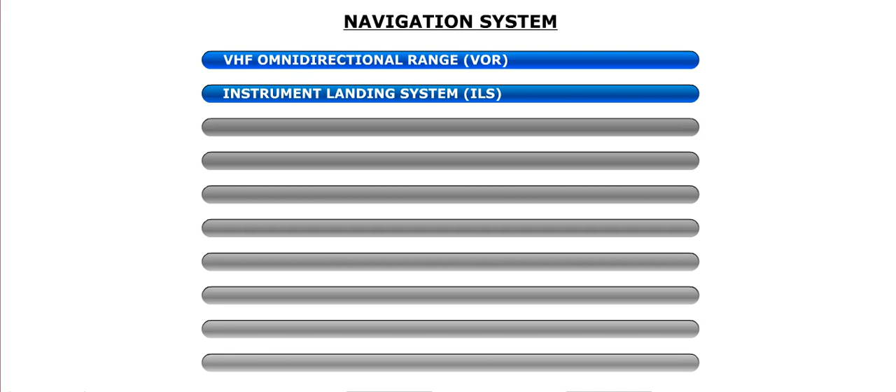The ATR is equipped with the following navigation systems: VHF Omnidirectional Range, or VOR, Instrument Landing System, or ILS, Distance Measuring Equipment, or DME, Automatic Direction Finder, or ADF, Marker Beacon, Radio Altimeter, Enhanced Ground Proximity Warning System, or EGPWS, Weather Radar, Global Positioning System, or GPS, and Flight Management System, or FMS.

The navigation system uses numerous antennas that are mounted on various locations on the exterior of the aircraft.

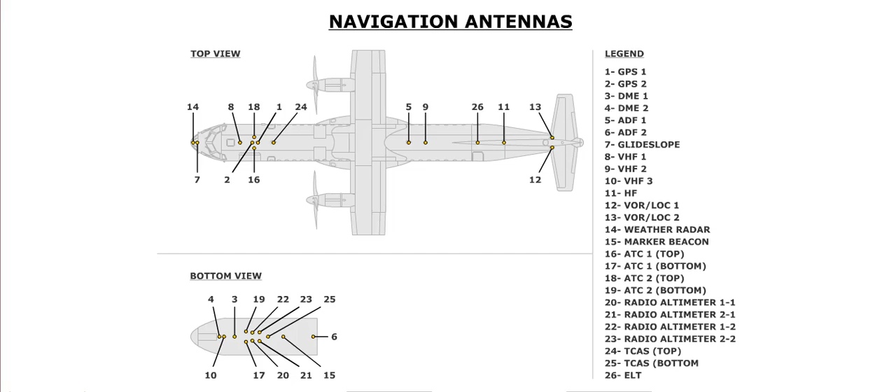Navigation information feeds audio signals to the Remote Control Audio Unit, or RCAU, so that the crew may identify and verify station identifiers. The RCAU is the central processor of audio signals from all of the cockpit electronics. There is a separate processor for each crew member, which controls audio based on what the crew selects on their individual audio control panel, or ACP. There are different channels of output for headsets, loudspeakers, etc.

There are two navigation receivers, VHF Nav1 and VHF Nav2. Each navigation receiver integrates VOR, ILS, marker beacon, and ADF receivers. If a single DME receiver is installed, it is integrated in the VHF Nav1 receiver.

VHF Nav1 feeds data directly into the Integrated Electronic Standby Instrument, or IESI. Both receivers supply data to the Data Concentration Applications, or DCAs, located in the core avionics cabinets, or CACs. Data is then fed to display units 1, 2, 4, and 5, as well as both multifunction control display units, or MCDUs.

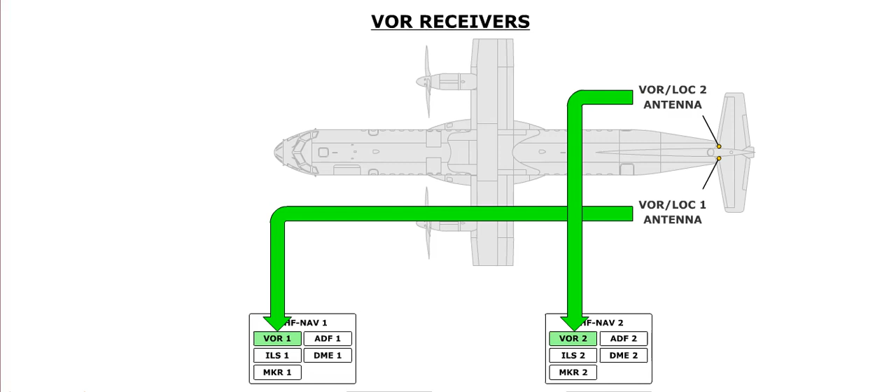The VOR receivers are tuned using the Virtual Control Panel, or VCP, and the associated Multifunction Panel, or MCP. The VCP appears on the lower right side of the multifunction display, or MFD. Click on the Nav button on the MCP to view the VOR navigation page on the VCP.

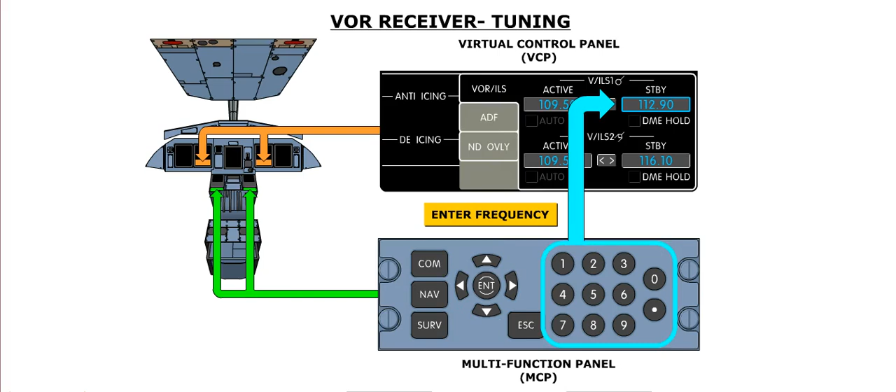The four arrows on the MCP are used to select the field that you wish to modify. The Enter key is used to activate that field. A cyan box appears around the selected field. You can then use the numerical keys to enter the desired frequency. The standby and active frequencies can be swapped by selecting the field in between the two frequencies. It should be noted that you can directly change the active frequency without the need of entering a standby frequency.

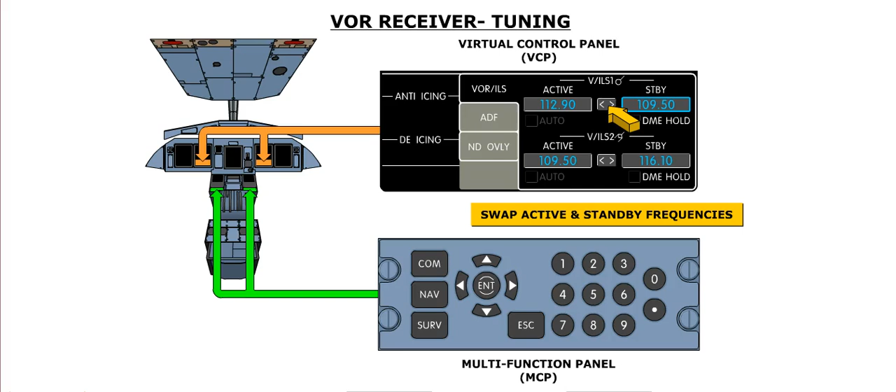The nav tuning page for nav1 is displayed on the MCDU screen. Frequencies are entered in the scratch pad. You can set the active or standby frequency by pressing the line select key adjacent to active or standby, respectively. Click on line select key R1 to make the standby frequency the active one.

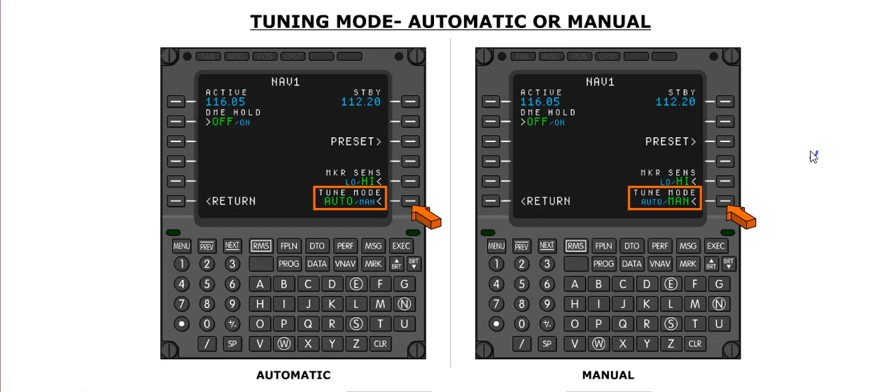The navigation page also enables you to hold the DME associated with the frequency, and change the sensitivity of the marker receiver.

The aircraft is equipped with two ILS receivers, ILS-1 and ILS-2. ILS-1 is located in VHF NAV-1 receiver. ILS-2 is located in VHF NAV-2 receiver. The IESI uses ILS-1 only.

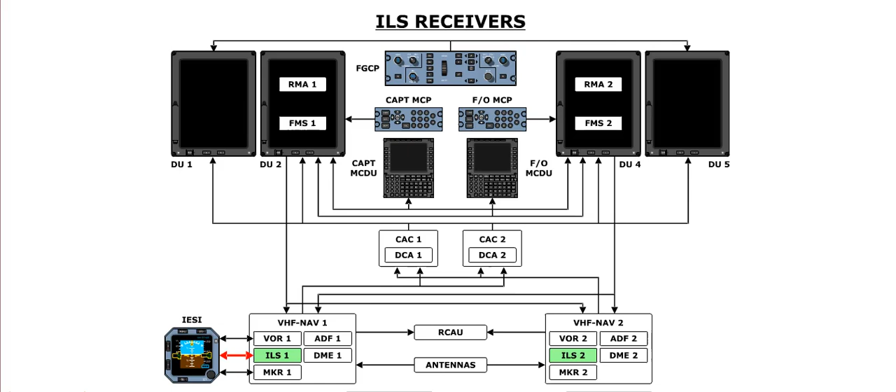The ILS receivers are independent of each other. However, they share the same glide slope antenna. The localizer antennas are actually the same antennas used by the VOR system, located on the vertical stabilizer.

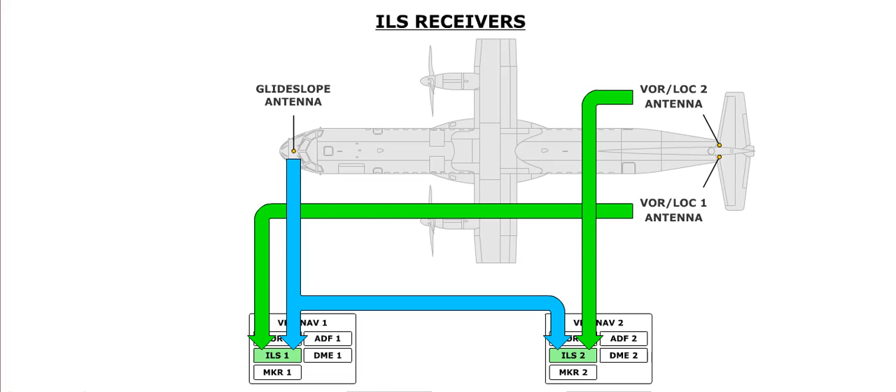The ILS receivers supply audio signal information to the RCAU. The ILS receivers are tuned using the VCP and the MCP. The MCDU is also used to tune the ILS frequencies. The procedure is identical to the VOR tuning.

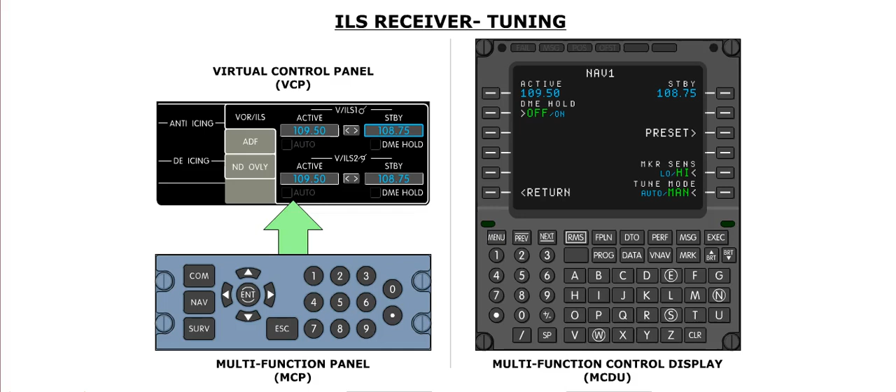The ATR has two marker beacon receivers. Although independent of each other, the two marker beacon receivers share the same antenna. The marker beacon antenna is located on the bottom side of the fuselage, just forward of the main landing gear base.

The marker beacon receivers are designed to receive marker signals from the outer, middle, and inner airway markers of an ILS approach. Station passage is indicated by an audio signal and an indication on the primary flight display, or PFD.

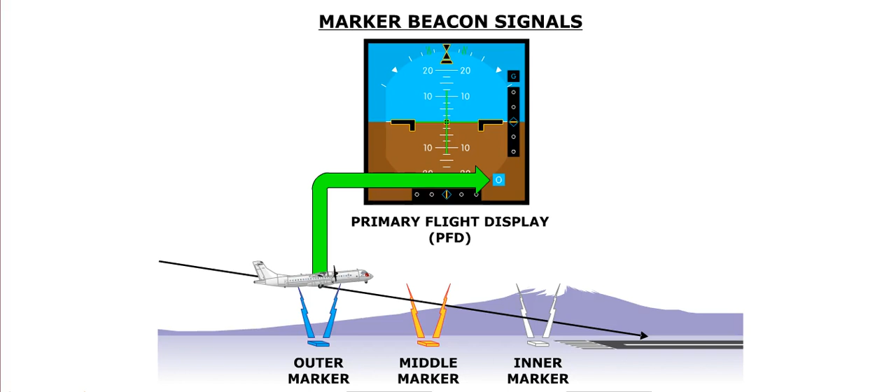The sensitivity of the marker beacon system can be adjusted on the nav tuning page of the MCDU. The sensitivity of the receivers can be adjusted to low or high. This sensitivity is changed by pressing the adjacent line select key.

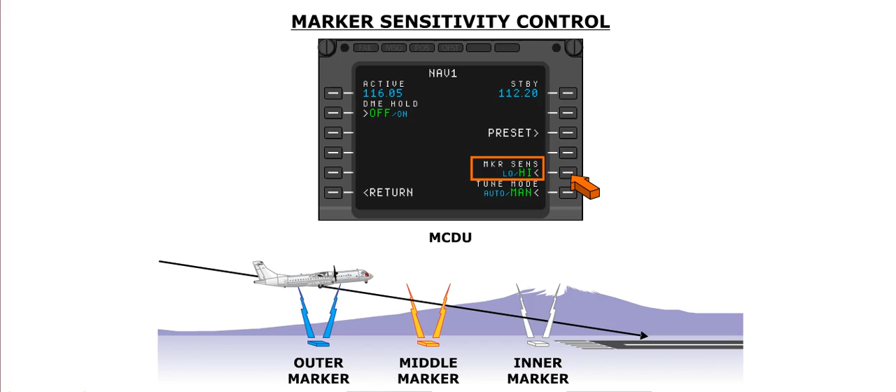The DME system measures the slant range to selected stations. The DME distance is displayed on the PFD and the navigation display, or ND. The DME has 3 channels, which allows it to lock in on 3 different stations. Channel 1 is associated with VOR/ILS1, and Channel 2 is associated with VOR/ILS2. Channel 3 is always tuned automatically by the FMS.

DME frequency selection can be controlled by either the VCP or the MCDU. Basically, whenever you tune an ILS or VOR frequency, you are also tuning the associated DME channel.

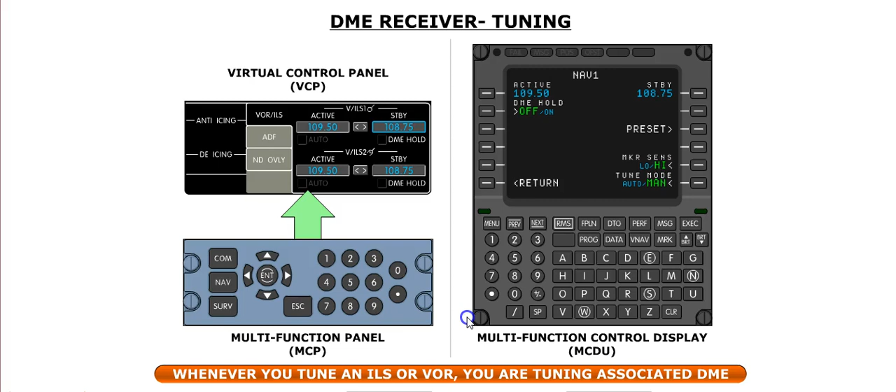One feature of the DME system is that you can hold a frequency. When you hold a DME frequency, you can continue to obtain distance information from that navigation source, even if you change the frequency later on. On the VCP, a DME is held by checking the DME hold box on the VOR/ILS page. On the MCDU, you use line select key L2 to select on for DME hold. On the PFD and ND, a held DME is indicated by the sign H displayed next to the DME distance.

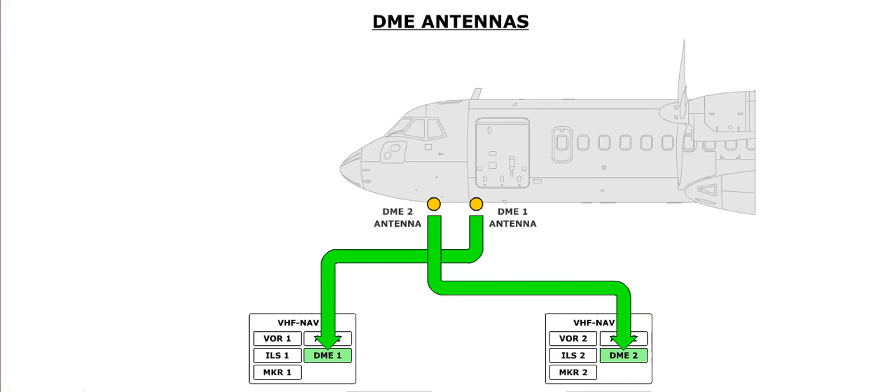Unlike the ILS and VOR receivers, each DME receiver has its own dedicated antenna. The DME antennas are located under the forward part of the fuselage. The DME receivers supply information to the RCAU.

An automatic direction finder, or ADF system, includes a single receiver and associated antenna, which is located on the top of the fuselage. Some aircraft have an optional second ADF receiver, which has an associated antenna located on the bottom of the fuselage.

The ADF radios are tuned using the VCP and the MCP. The procedure is similar to accessing the VOR/ILS radios. Press the nav button on the MCP, and then press it a second time to access the ADF page on the VCP.

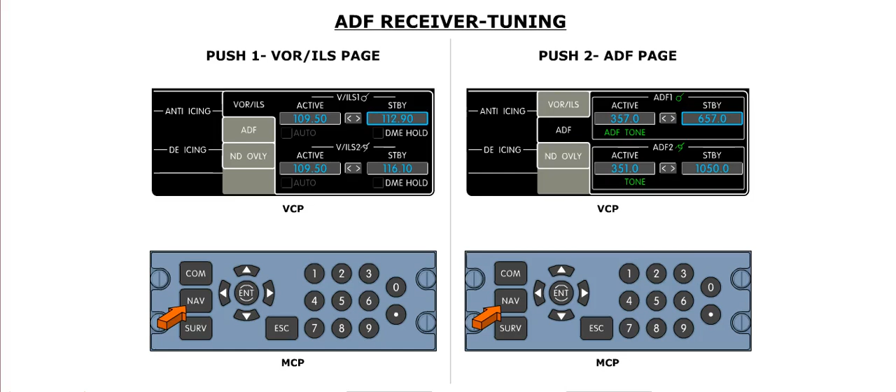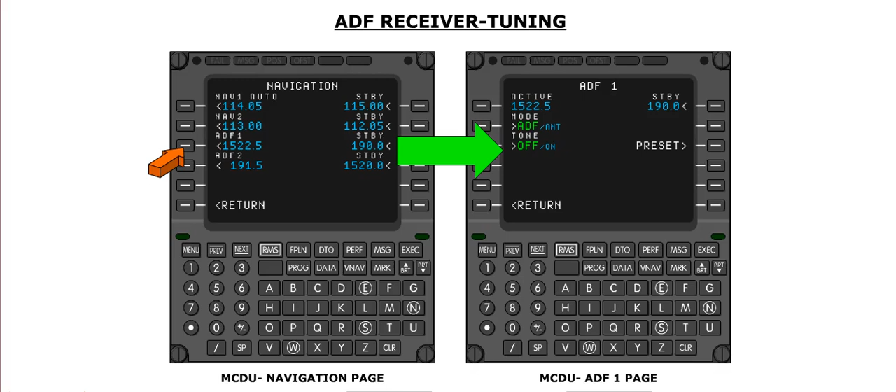The MCDU is also used to control the ADF radios. This is done by accessing the navigation page, and then pressing line select key L3 or L4. This will display the associated ADF page, which enables you to control the active and standby frequencies, mode and tone selection, or access pre-stored frequencies. ADF bearing information drives the bearing information on the HSI on the PFD, and on the ND on the MFD.

The aircraft is equipped with a radio altimeter which provides an indication of the aircraft's height above the ground when the aircraft is below 2,500 feet AGL. There is also an optional second radio altimeter. The radio altimeter system provides inputs to the multifunction computers, or MFCs, the automatic flight control system, or AFCS, the traffic collision avoidance system, or TCAS, and the enhanced ground proximity warning system, or EGPWS.

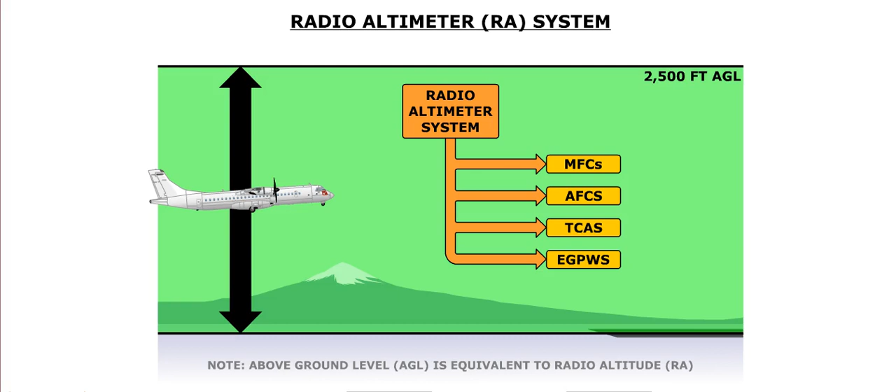The radio altimeter system consists of a single transceiver and two radio altimeter antennas. The two radio altimeter antennas are located on the bottom part of the fuselage, forward of the landing gear bay. Height is determined by reflecting radar signals off the terrain. This system uses the leading edge of the reflected radar wave to calculate the aircraft's height above the ground.

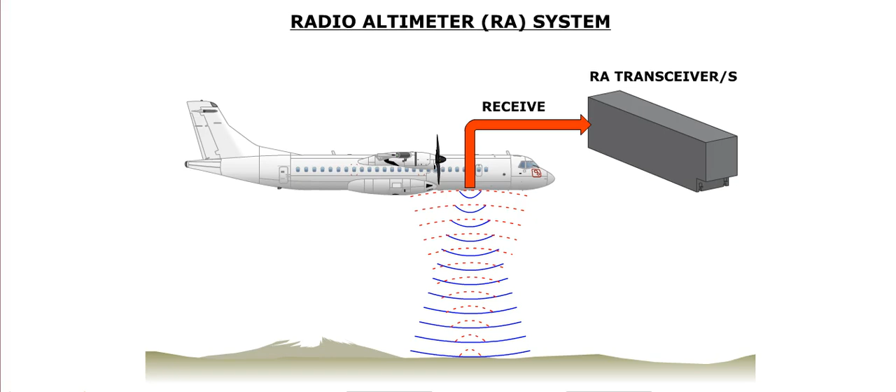The radio altimeter reading is displayed on the bottom part of the attitude indicator on the PFD. The system also drives the altitude above ground indication on the altimeter. The display can indicate altitudes between 0 and 2,500 feet.

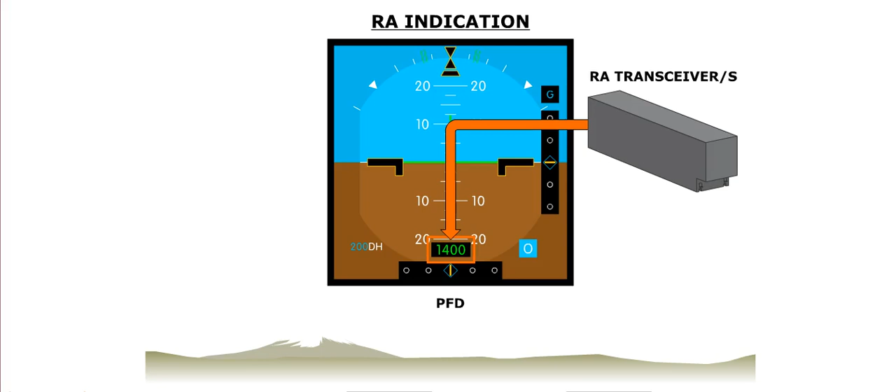A decision height can be set using the Associated Index Control Panel, or ICP. This selected value is displayed in the bottom, left-hand side of the attitude indicator. An additional DH label is displayed when the aircraft descends through the selected decision height.

The ATR is equipped with an enhanced ground proximity warning system, or EGPWS. EGPWS provides 6 reactive modes named Modes 1 through 6, as well as 2 predictive warning modes for terrain and obstacle cautions and warnings.

This system uses internal terrain, obstacle, and airport databases, along with information from the GPS, radio altimeter, and barometric altimeter to predict a potential conflict between the aircraft's flight path and terrain or obstacles.

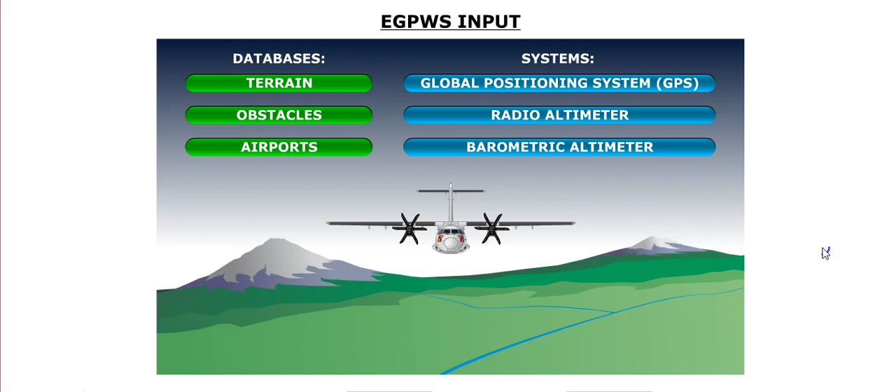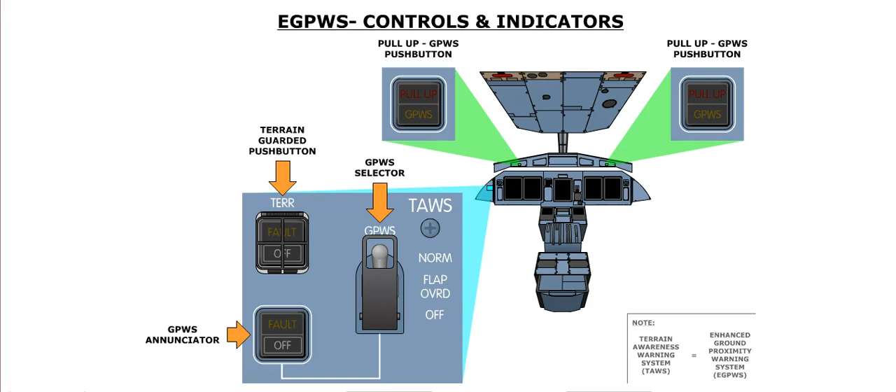The controls and indicators for the system consist of 2 GPWS push buttons on the glare shield, a GPWS selector switch, a terrain-guarded push button, and a GPWS annunciator light.

Terrain or obstacle conflicts result in the EGPWS providing visual terrain alerts that are automatically displayed on the ND, as well as aural alerts. It should be noted that EGPWS is not to be used for navigation purposes.

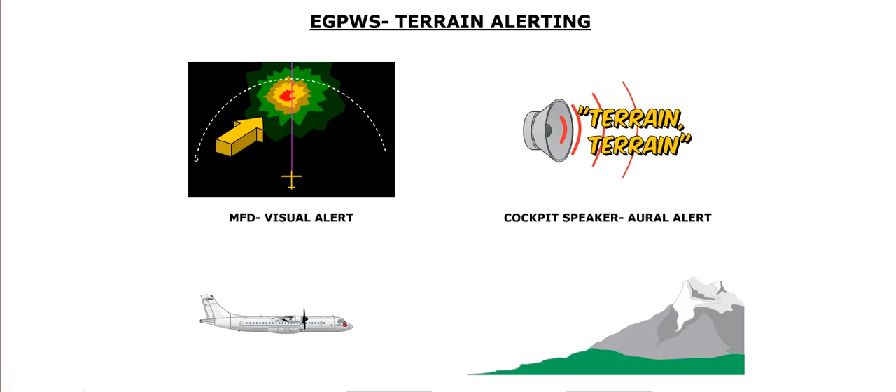Terrain information can always be displayed on the ND by selecting the terrain option on the ND overlay page on the VCP. If the overlay is selected, a cyan terrain on label is displayed on the lower right side of the ND. The terrain display takes precedence over the radar display, so selection of the terrain display will replace the radar display on the ND.

The caution and warning envelopes below and in front of the aircraft are based on airspeed and the current flight path angle.

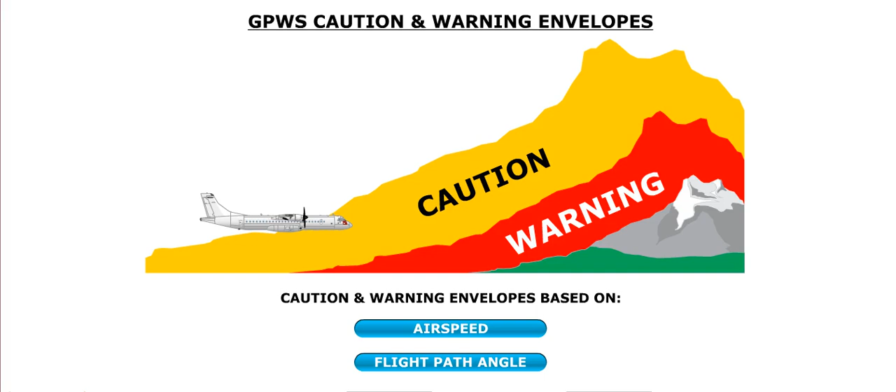Mode 1 alerts are generated when the descent rate is excessive while the aircraft is close to the ground. If the aircraft's descent rate, below 2,450 feet radio altitude, exceeds a certain value, the EGPWS issues an aural sink rate warning, and the amber GPWS caption illuminates. If the descent rate increases, the EGPWS will announce pull up, and the red pull-up caption illuminates. This warning will continue until the aircraft's descent rate is corrected.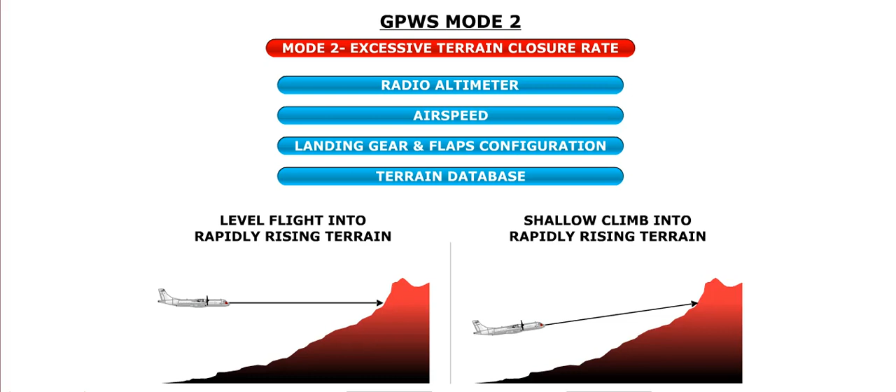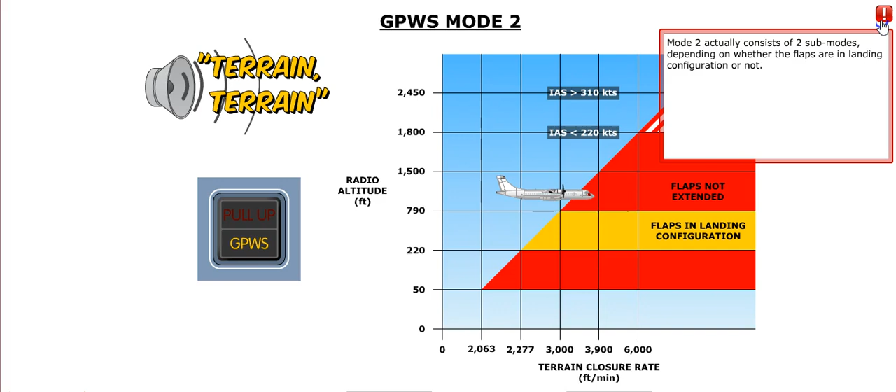Initially, the system will generate the terrain aural alert, and the amber GPWS caption illuminates. If the closure rate is not corrected, the EGPWS will eventually issue an aural pull-up warning, and the red GPWS caption illuminates. The aural warning is repeated until the aircraft's closure rate is reduced. During the correction, the pull-up aural warning will be replaced with the terrain aural caution.

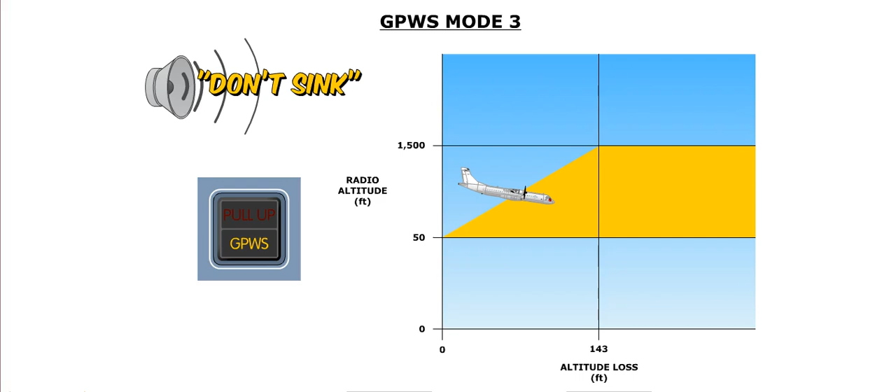Mode 3 provides warnings when there is a significant altitude loss after takeoff or during a go-around. In the event of an altitude loss after takeoff or go-around, the EGPWS will issue an aural don't sink caution message, and the amber GPWS caption illuminates. Mode 3 is disabled when the aircraft has gained sufficient altitude and is no longer in the takeoff or go-around mode. It is active up to 1,500 feet after takeoff or during the missed approach.

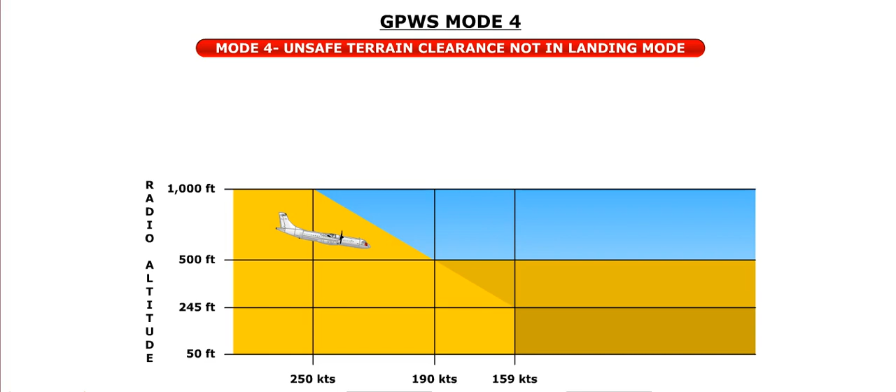Mode 4 provides unsafe terrain clearance alerts and warnings during climb, cruise, initial descent, or approach. The EGPWS uses the radio altimeter and the aircraft's position in relation to the terrain database. Mode 4 actually consists of 3 sub-modes.

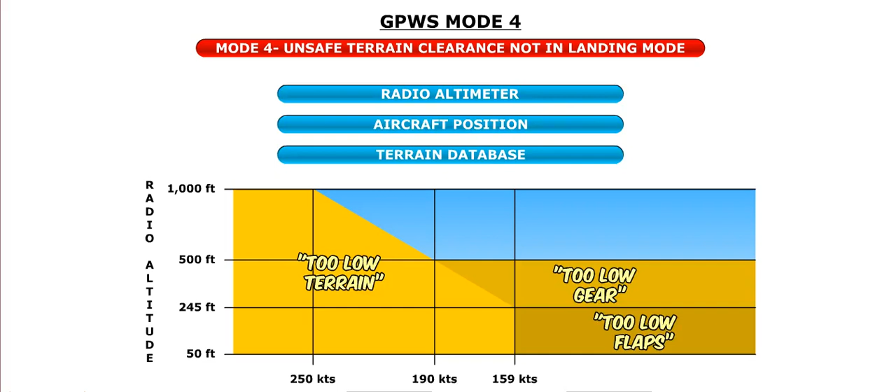Sub-mode 4A provides alerts in the event there is inadequate terrain clearance when the aircraft is not in landing configuration. The boundary for sub-mode 4A is 1,000 feet radio altitude. Sub-mode 4A alerts consist of an aural too low terrain warning, and an illuminated GPWS caption.

Submode 4B provides alerts to prevent a gear-up landing. The boundary for submode 4B is 500 feet radio altitude and up to 190 knots. The oral alert associated with submode 4B is a too low gear aural alert, and the amber GPWS caption illuminates.

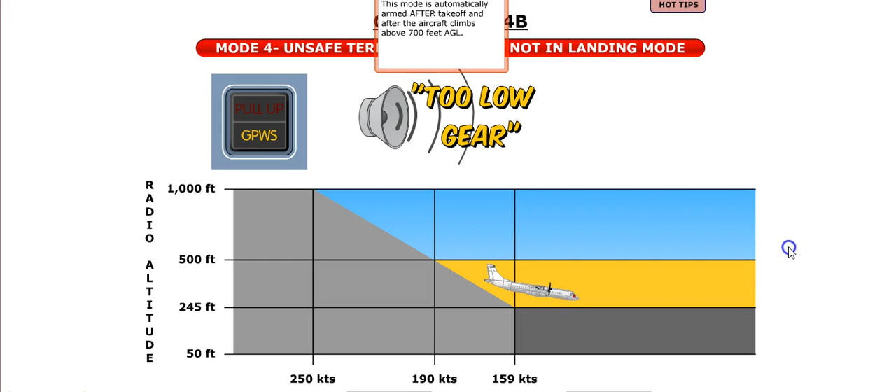Submode 4C is activated when the aircraft is on approach with the landing gear extended and the flaps are not in the landing configuration. The boundary for submode 4C is 245 feet radio altitude and up to 159 knots. The oral alert associated with submode 4C is a too low flaps aural alert, and the amber GPWS caption illuminates. In the event of an abnormal flap position, the submode 4C too low flaps aural warning can be disabled by the flap override position of the GPWS selector switch.

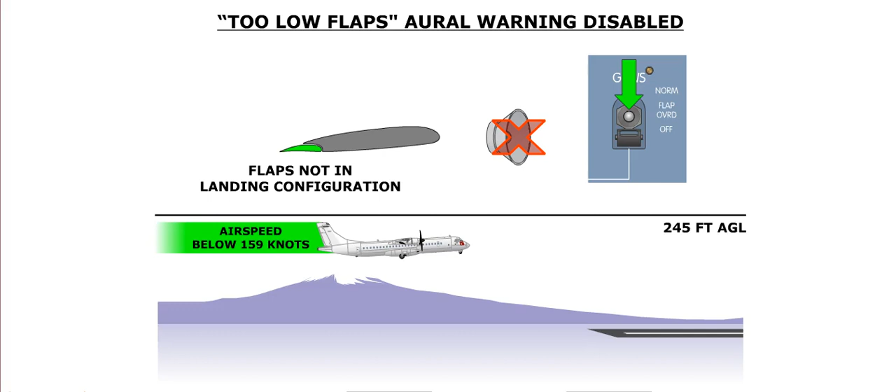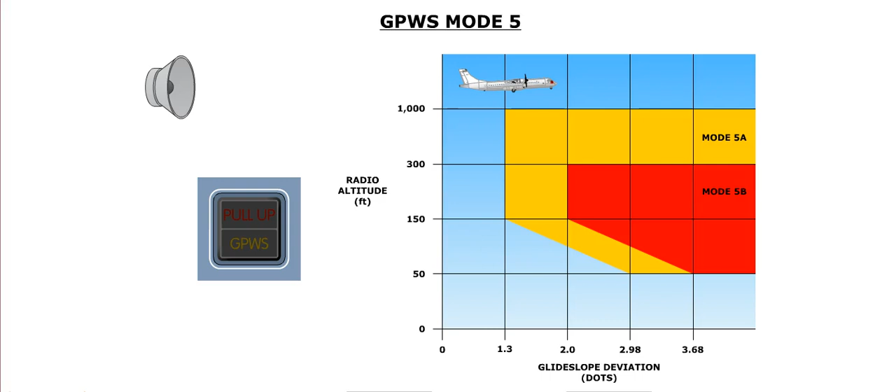Mode 5 provides below glide slope deviation alerts when the aircraft has penetrated the glide slope alert envelope and is below 1,000 feet radio altitude. If the aircraft is more than 1.3 dots below the glide slope, the EGPWS issues a soft glide slope aural alert. This is called a soft alert.

If the aircraft is below 300 feet radio altitude and more than 2 dots below the glide slope, the EGPWS issues a loud aural glide slope alert. This is called a hard alert. In both cases, the amber GPWS caption illuminates.

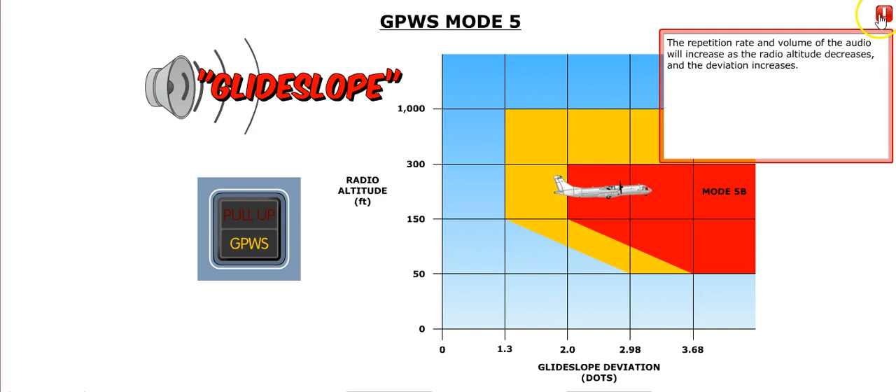Mode 6 warning provides oral callouts below certain radio altitudes, as well as an oral alert for excessive bank angles. The alerts associated with an excessive bank consist of a bank angle oral alert, and the amber GPWS caption illuminates. The EGPWS will issue an oral minimums callout when the aircraft descends below the selected decision height.

A failure of any or all GPWS modes is indicated by the illumination of the amber fault caption on the GPWS annunciator light. All GPWS functions can be disabled by placing the GPWS selector switch to the off position.

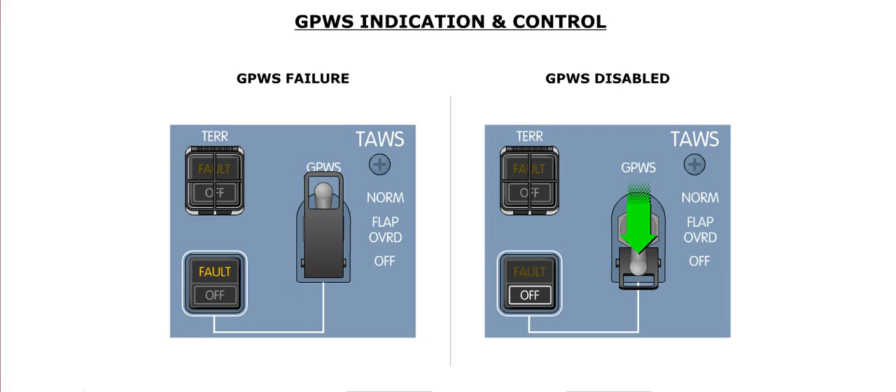The EGPWS database has a terrain clearance floor, or TCF envelope, specified for each runway in the database. The TCF provides an additional protection envelope for the aircraft, regardless of the configuration. If the aircraft penetrates the floor, the EGPWS will generate a too low terrain alert, and the amber GPWS caption illuminates. The altitude of the floor decreases as the aircraft approaches the runway.

An additional floor envelope is specified in the database for runways that are significantly higher than the surrounding terrain. This envelope is called the Runway Field Clearance Floor, or RFCF, and it is based on geometric altitude. This envelope extends 5 nautical miles from the runway, and has a ceiling of 300 feet above the field elevation. A too low terrain alert is generated if the aircraft penetrates this boundary.

eGPWS provides terrain and obstacle awareness based on the GPS geographic position and the aircraft's altitude. These two pieces of information are compared to the worldwide terrain database to predict potential conflicts between the aircraft's flight path and the surrounding terrain.

The terrain overlay shows terrain as patterns of colored dots. The color of the patterns depends on the altitude of the terrain in relation to the aircraft's altitude.

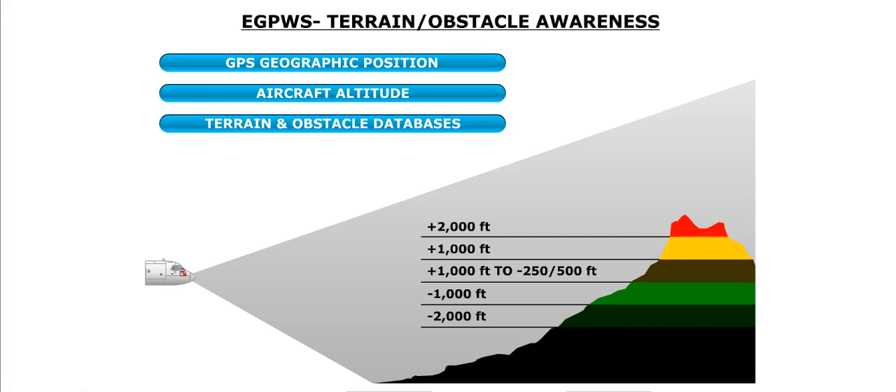In the event the system predicts a conflict, the terrain will automatically be displayed on the NDs, and the display range automatically defaults to 10 nautical miles. The system will generate a terrain advisory line on the terrain map at the point where a terrain caution alert will occur if the current aircraft trajectory is maintained. The conflicting terrain are shown in solid yellow. In addition, the system will generate a terrain ahead or obstacle ahead oral alert, and the amber GPWS caption illuminates.

If the system detects an imminent collision, EGPWS will generate a warning in the form of a terrain ahead pull-up or obstacle ahead pull-up oral alert. In addition, the red pull-up and GPWS captions illuminate on the glare shield. A terrain overlay will automatically pop up on the ND, and the display's range defaults automatically to 10 nautical miles. The warning will continue as long as the current aircraft path does not safely clear the obstacle.

If the aircraft is not able to safely climb above the terrain, the system will generate an avoid terrain oral alert instead. The crew will need to immediately initiate an evasive maneuver to avoid impact.

Terrain can be displayed on the ND by selecting the terrain option on the ND overlay page on the VCP. Click on the terrain option to display terrain information.

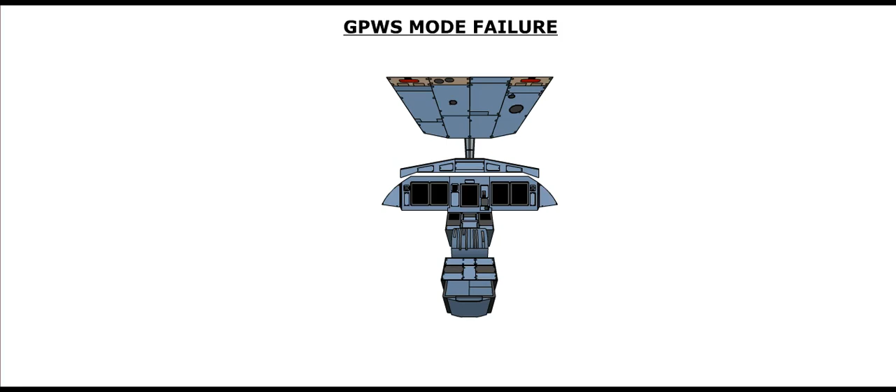In the event of one or more GPWS mode is lost, the fault caption illuminates in the GPWS annunciator light. Both master caution lights flash. An amber GPWS message is displayed on the engine and warning display, or EWD, and a single chime sounds. All GPWS functions can be deselected by placing the GPWS selector switch in the off position.

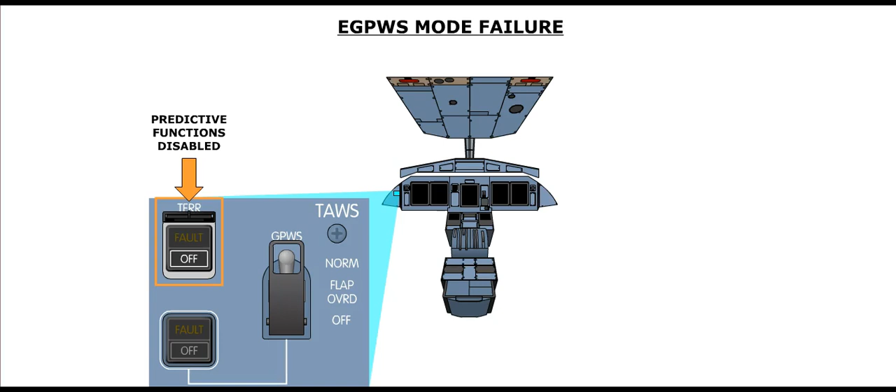The predictive functions of the EGPWS are enabled when the terrain push button is pressed in. Off disables all predictive functions. If some or all of the predictive modes have failed, the fault caption illuminates. Both master caution lights flash. An amber terrain message is displayed on the EWD, and a single chime sounds.

A color weather radar is installed on the aircraft. Once operating, weather radar returns are displayed on the ND. This is done by selecting the WX option on the VCP. The radar display consists of any returns, as well as radar system information, in the bottom right-hand side of the ND.

Weather returns are displayed in one of four colors, depending on the intensity of the return. The weather radar provides a coverage of up to 300 nautical miles, and will cover an arc of 45 degrees on each side of the aircraft.

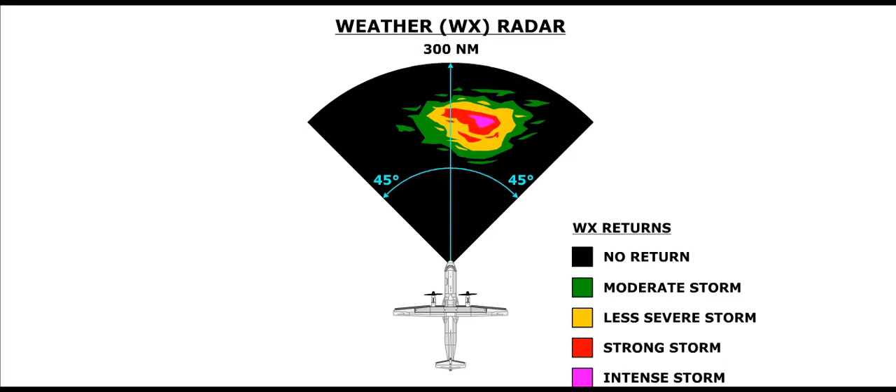The radar can also be operated in the ground mapping mode. In this mode, ground returns are also displayed on the NDs.

The weather radar system consists of a weather radar control panel, a radar transmitter receiver, and an antenna located in the forward part of the fuselage. The weather radar is controlled by the weather radar control panel. The operating mode is selected by the radar mode selector knob.

The weather radar system is inoperative when the mode selector is in the off position. Click on the mode selector to place it in the standby position. The standby position powers up the radar system. However, in this mode, the antenna is not rotating, and the weather radar transmitter is inhibited. In this mode, a WX standby message is displayed in white on the ND.

Click on the mode selector to place the radar system in the WX position. The weather radar is operating when the mode selector knob is in the WX position. If the radar is selected for display on the ND, weather radar returns will be displayed, and a green WXTX message is displayed in the radar status area of the display. Radar returns are colored depending on the intensity of the return.

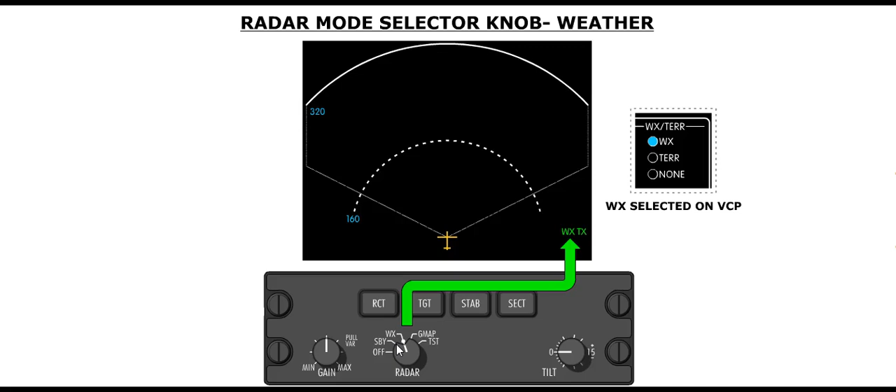Black simply means that no returns are detected. Returns in green indicate light precipitation. Returns in yellow indicate a moderate precipitation level. Red returns indicate strong precipitation. Magenta returns indicate intense precipitation.

It should be noted that the radar will automatically return to the standby mode after the aircraft lands, even if the mode selector is in the WX position.

The radar system is placed in the ground mapping mode by placing the mode selector knob in the GMAP position. In this mode, the colors displayed vary according to the intensity of the return. In the ground mapping mode, the radar status indicates WX GMAP in cyan.

The test position of the mode selector tests the radar system and displays a test pattern on the ND. In addition, the radar status indicates WX test in yellow if there are no detected faults.

Four push buttons at the top of the weather radar control panel provide additional modes of operation.

The REACT mode is selected or deselected by pressing the RCT push button on the radar control panel. The REACT mode compensates the radar returns for attenuation due to the radar signal traveling through precipitation. This gives a more accurate picture of what is happening behind a red zone.

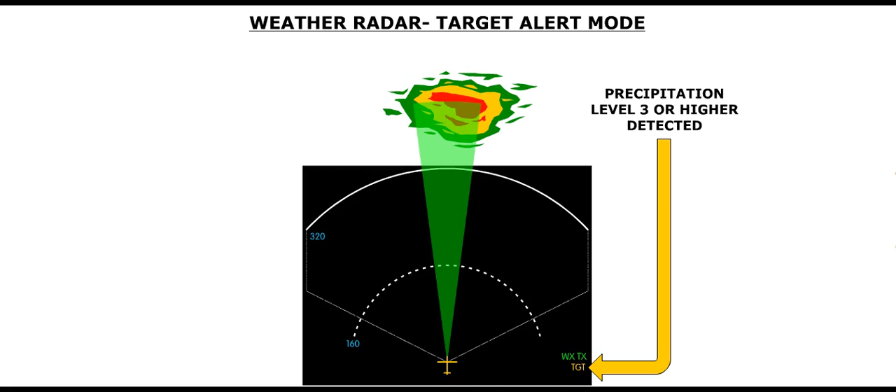The radar antenna is automatically stabilized by the attitude heading and reference system, or AHRS, through the CACs, in order to provide a level sweep during maneuvers. This stabilization function can be turned on or off with the stabilizer push button. When off is selected, an OFF caption illuminates above the push button.

Normally, the radar antenna sweeps an arc of 120 degrees in front of the aircraft 12 times per minute. The scan speed can be increased by pressing the sector push button. This increases the scan rate to 24 sweeps per minute by reducing the scanned arc to 60 degrees.

The radar antenna tilt can be adjusted 15 degrees up or down by means of the tilt control knob. The amount of tilt is indicated on line 4 of the radar status display on the ND.

Gain control adjusts the sensitivity of the radar receiver. The gain control knob is a combination rotating knob and push-pull button. When the gain control knob is pressed, the radar gain is automatically set to a preset calibrated value. Once pressed in, rotation of the knob will have no effect on the radar gain.

When the gain control knob is pulled out, the gain of the radar system can be manually adjusted by rotating the knob to the desired position. When the gain is manually set, the radar status display on the ND will indicate a green G, VAR label.

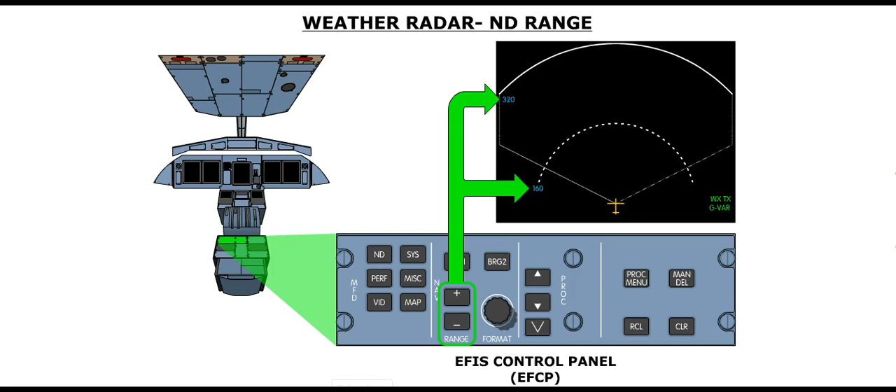The aircraft is equipped with a global positioning system, or GPS, which uses a series of navigation satellites to provide position, ground speed, date and time, as well as data quality information. The aircraft can be equipped with dual GPS.

The Flight Management System, or FMS, uses the GPS as a source of location data and date and time information. GPS time can also be displayed on the aircraft clocks.

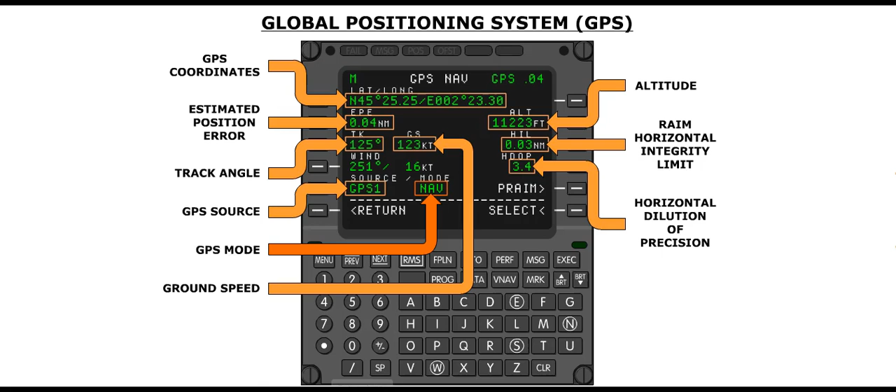The aircraft is equipped with a dual flight management system, or FMS. The FMS is the core of the aircraft's management system, and it is used to manage the aircraft during all phases of flight. The FMS handles the management of the flight plan, calculates predicted values, as well as manages the various aircraft system sensors.

The software and database for FMS1 is housed in DU2. DU4 houses the software and database for FMS2.

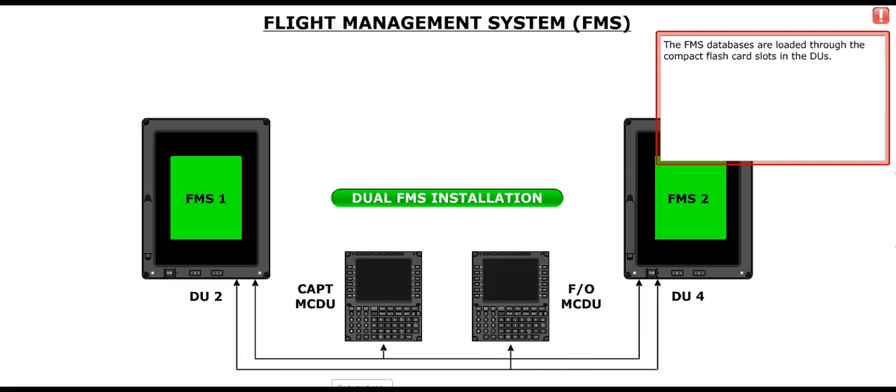The databases include 2 standard navigation databases that cover 2 revision cycles, an optional company navigation database, an optional pilot navigation database, and a magnetic variation database.

The 2 flight management systems perform their own functions independently of each other. However, modifications made in one FMS are synchronized with the second FMS, so that both will use the same parameters.

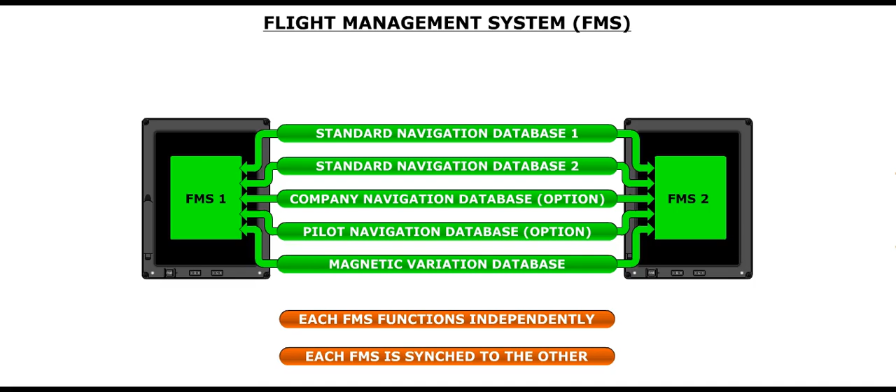The FMS is controlled by 2 MCDUs, 2 VCPs and their associated MCPs, and the Flight Guidance and Control Panel, or FGCP.

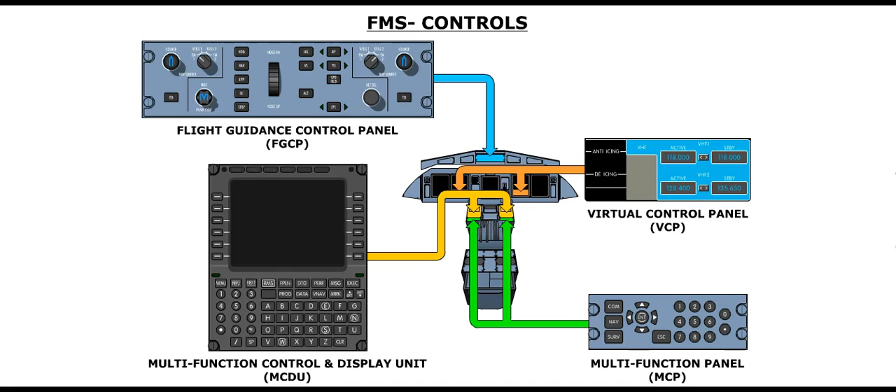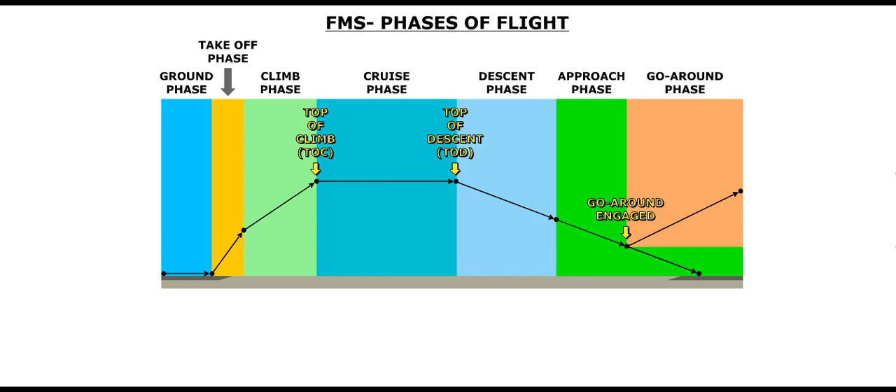The FMS divides a flight into several phases, including ground, takeoff, climb, cruise, descent, approach, and go around. The phase of flight depends on the weight on wheel status, aircraft altitude, location with respect to the top of climb or top of descent, distance to the destination airport, and the engagement of the go-around mode.

The FMS performs both lateral and vertical navigation of the aircraft when it is coupled to the autopilot system.

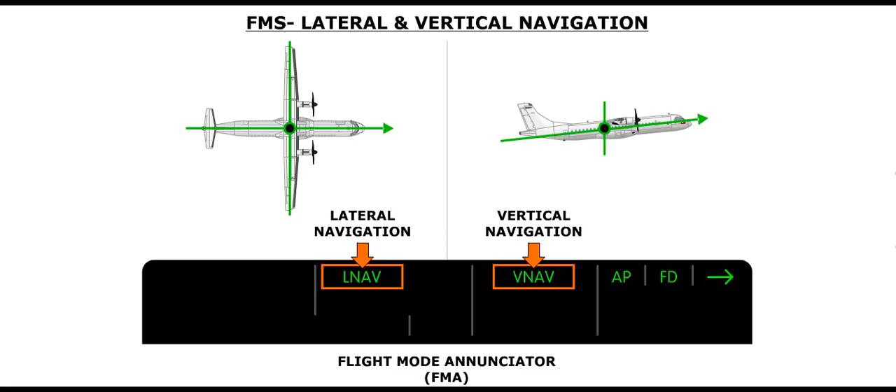Each pilot interacts with the FMS using their associated MCDU. You can think of the MCDU as the monitor and keyboard that you use to interact with your computer.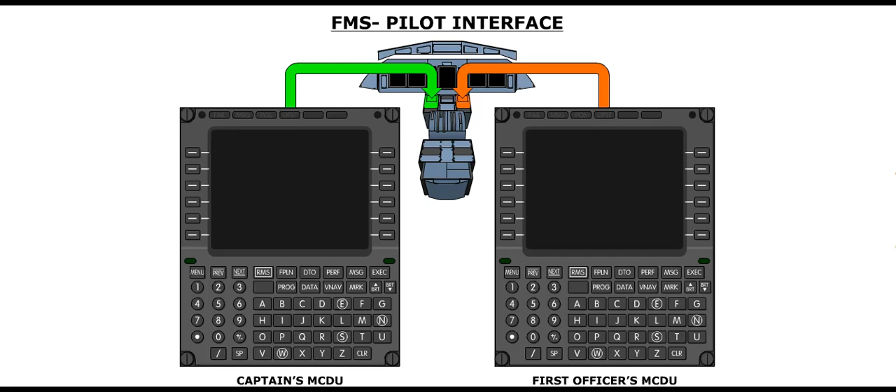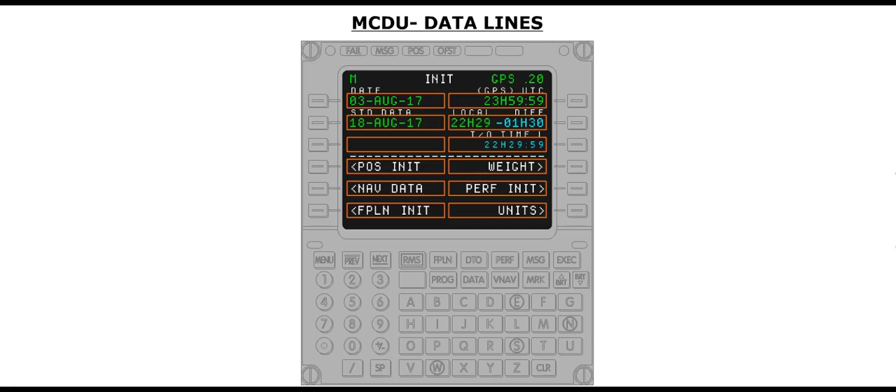Data is displayed under the page title. There are 6 lines of data on each side of the screen. In general, each line of the screen has a label that identifies the type of data on the line underneath it. For example, on the screen, we are looking at the initialization page. The first line of the left side shows the current date, as indicated by the date label above it.

Keys adjacent to each line, on either side of the screen, are used to enter data or to select it. These are called line select keys, and they are identified by a letter and number. The letter indicates whether the key is on the left or right side of the screen. The number identifies the row of the data. For example, line select key L1 is the top line select key, on the left side of the display.

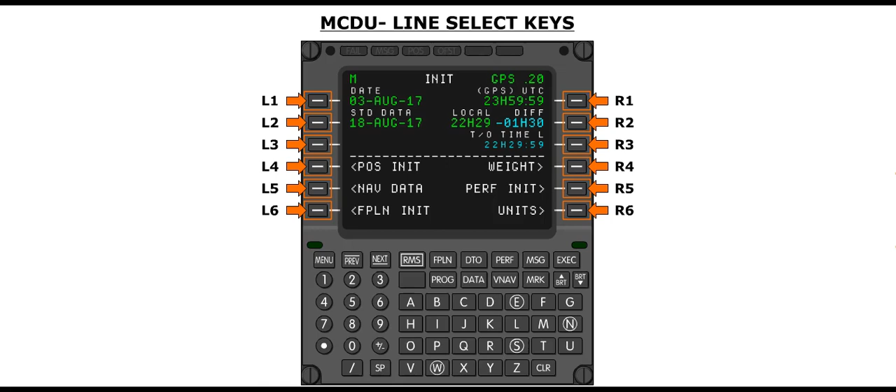If a line contains a caret, it means that pressing the adjacent line select key will display a different page. For example, click on line select key L4. The adjacent text indicates that the line select key will display the position initialization page.

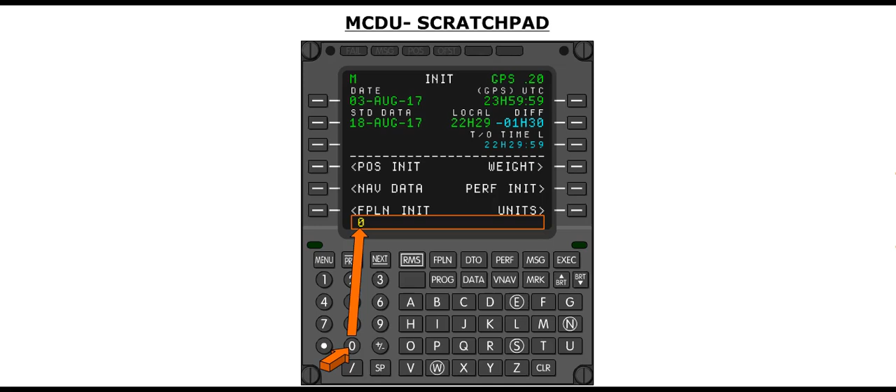The bottom line of the display screen is called the scratch pad. The scratch pad is used to type in data that can then be line selected to one of the lines. Data is entered into the scratch pad by using the alphanumeric keys on the MCDU.

For example, if you wish to modify the initial position when the aircraft is at the gate, you would type in the coordinates in the scratch pad, and then press line select key L1 to enter the data.

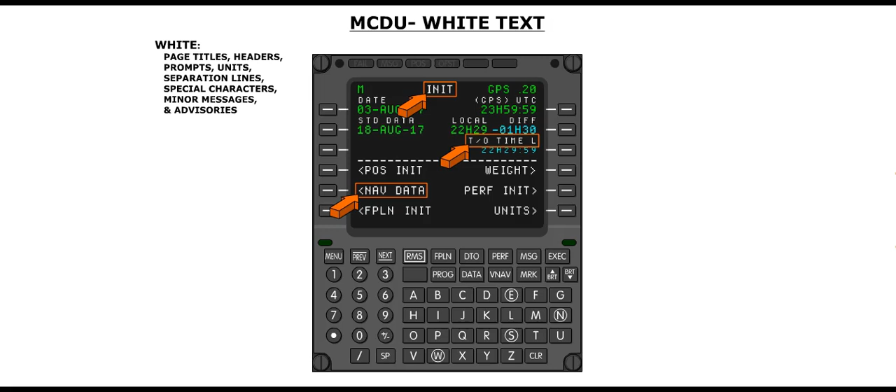You probably noticed by now that the screen shows data in different colors and fonts. White is used for page titles, headers, prompts, units, separation lines, special characters, and minor messages and advisories. Cyan is used to denote data that can be modified or selected, and missed approach waypoints.

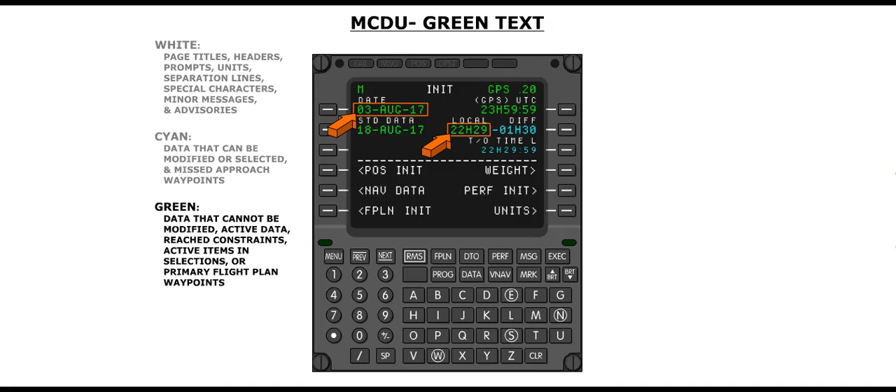Green denotes data that cannot be modified, active data, reached constraints, active items in selections, or primary flight plan waypoints. Amber is used to indicate alerts, missed constraints, or negative margins. Amber boxes indicate mandatory data, in which case, data can be entered in that field.

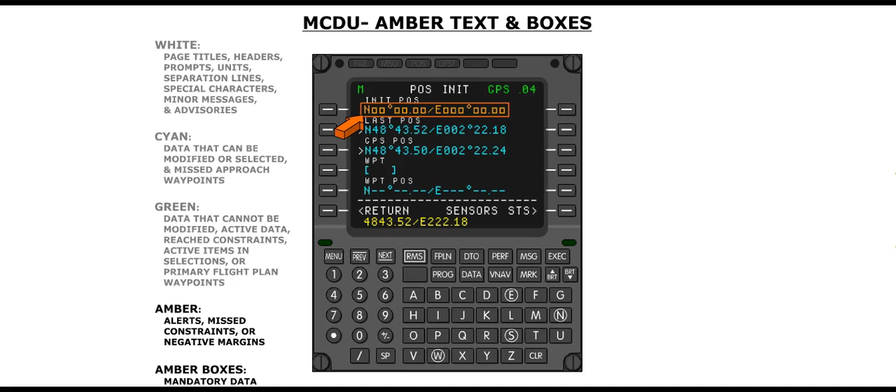Magenta denotes targets set by the FMS. For example, on the ND, the active waypoint is displayed in magenta. On the flight plan page of the MCDU, that waypoint is also displayed in magenta.

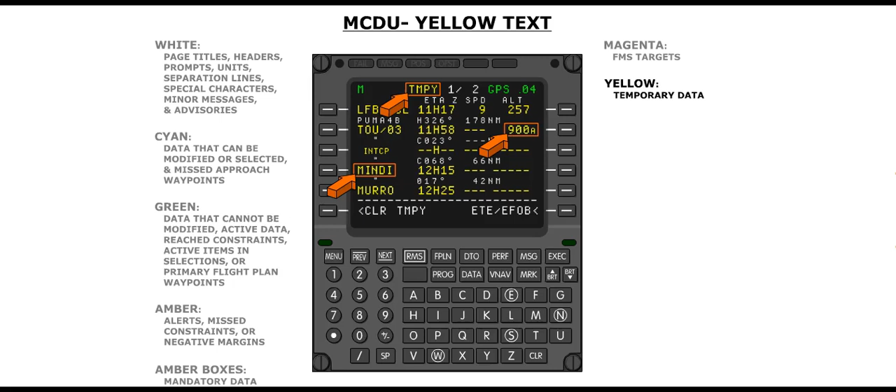The text on the screen can be displayed in large or small font, in reverse video, or be underlined. Each of these attributes has a special meaning. Text in small font is used for headers, data labels, units, default values for data, flight plan legs, or non-active selections.

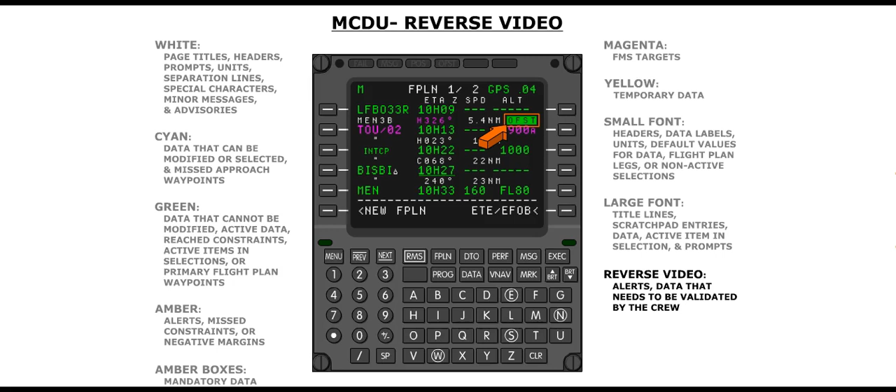Large font is used for title lines, scratch pad entries, data, active items in selection, and prompts. Reverse video is used for alerts in the title line or messages in the scratch pad. It is also used to indicate data that needs to be validated by the crew. Underlines are used for predicted data on the flight plan page if a constraint exists.

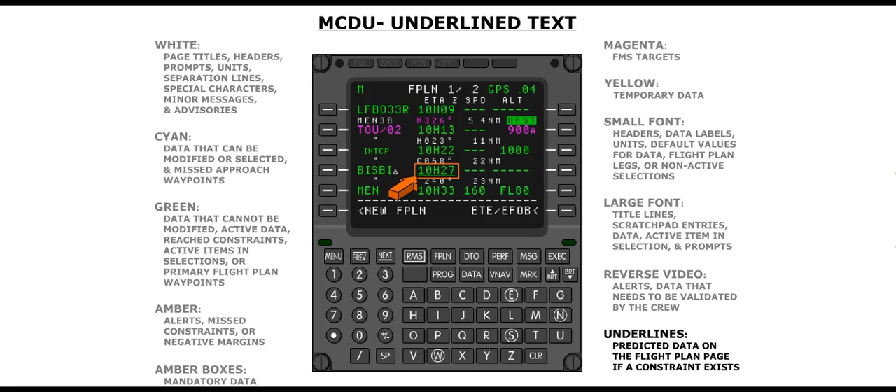The flight plan page shows all the legs of the active flight plan. It also includes information on constraints, course, heading, and the distance between each waypoint. It also shows predictions for the estimated time of arrival and the estimated fuel on board.

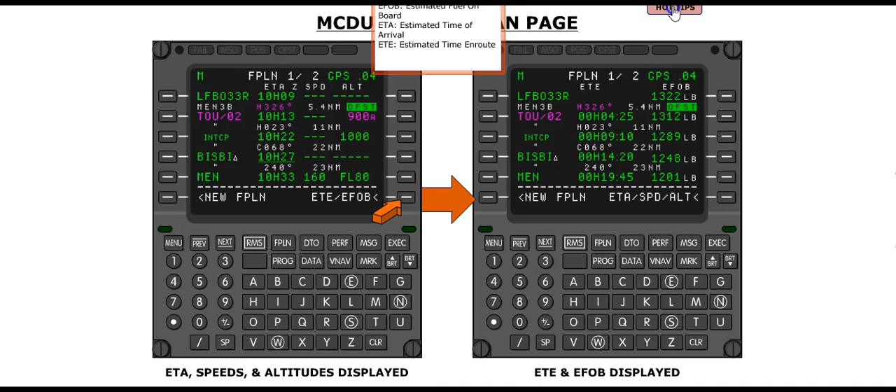The flight plan page is identified by the flight plan label. There is also a page number as well as the total number of pages for the flight plan chapter. You can move through all the pages by using the previous and next keys on the menu.

Some actions require a validation by the crew. This is indicated by the illumination of the execute light. When this light is illuminated, it means that you need to press the execute key in order to execute the command. This concludes the navigation module.